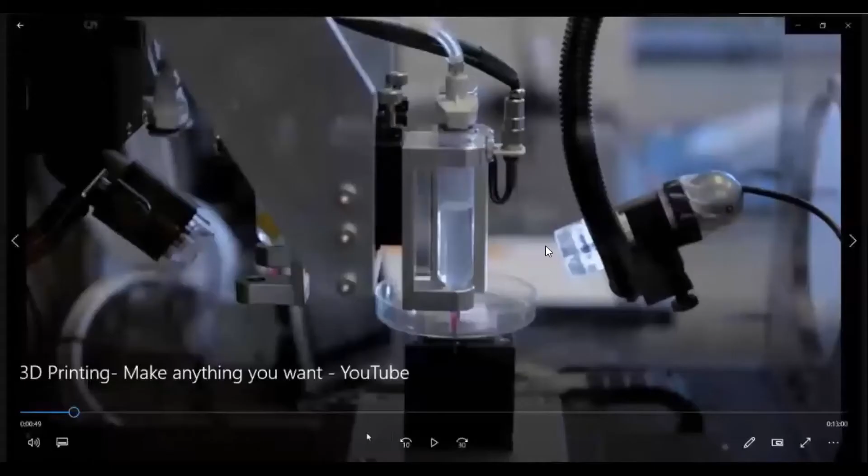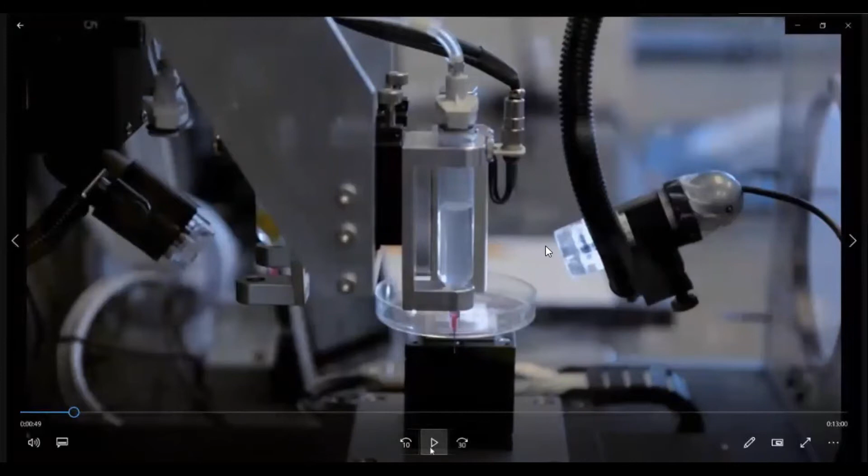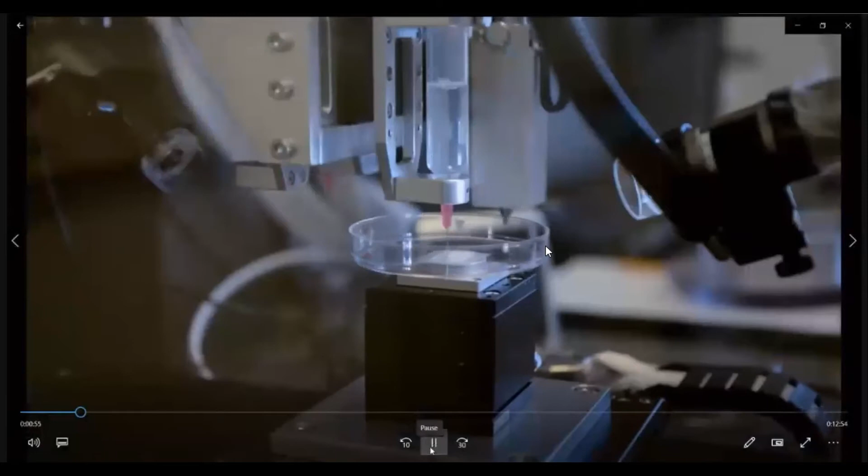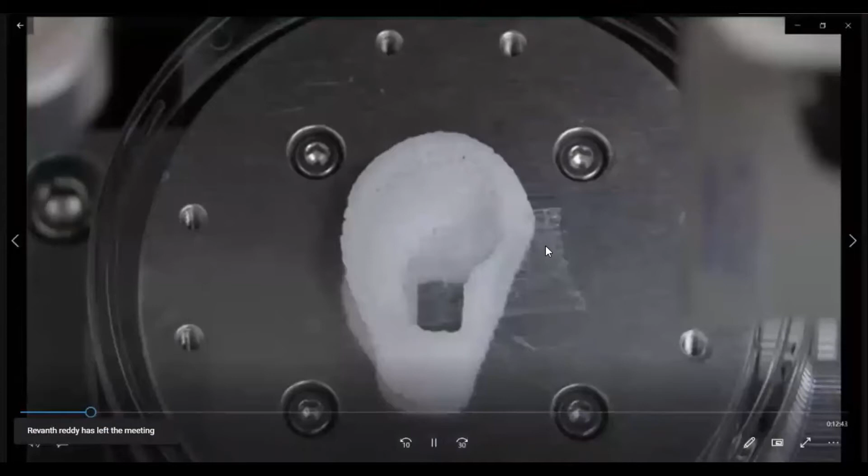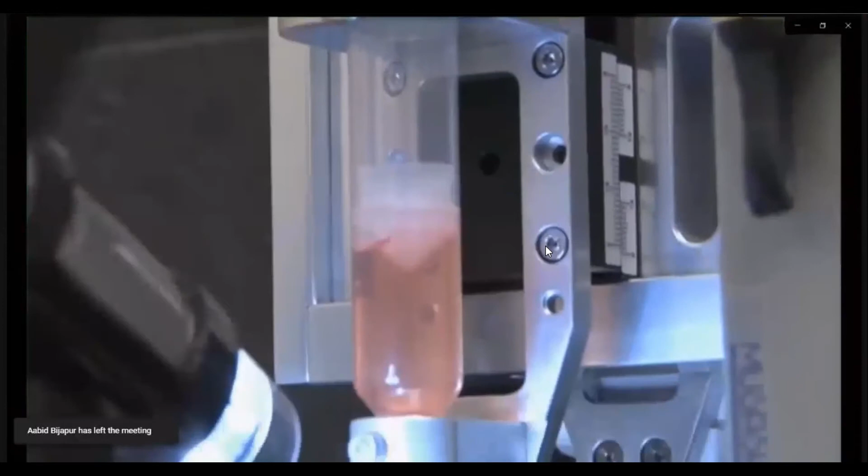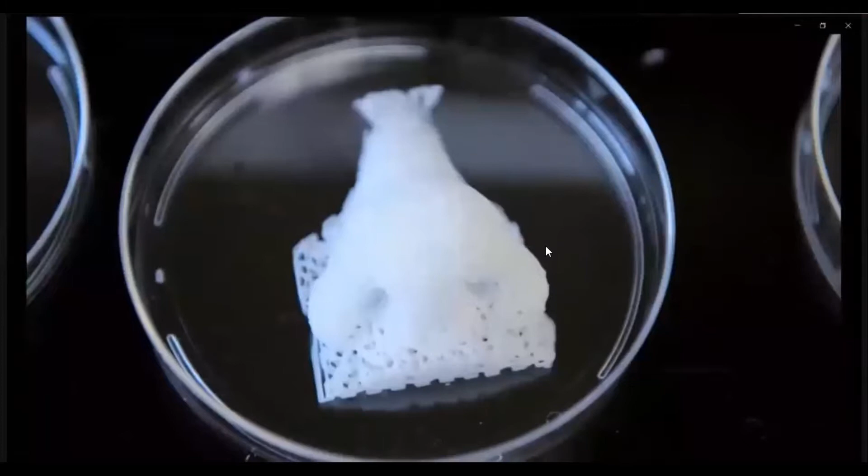The project is entitled 3D Printing. The premise is simple: send a scanned image of a body part to the printer, and the machine starts building ears, noses, fingers. Dr. Atala's goal is to transplant the parts directly into patients.

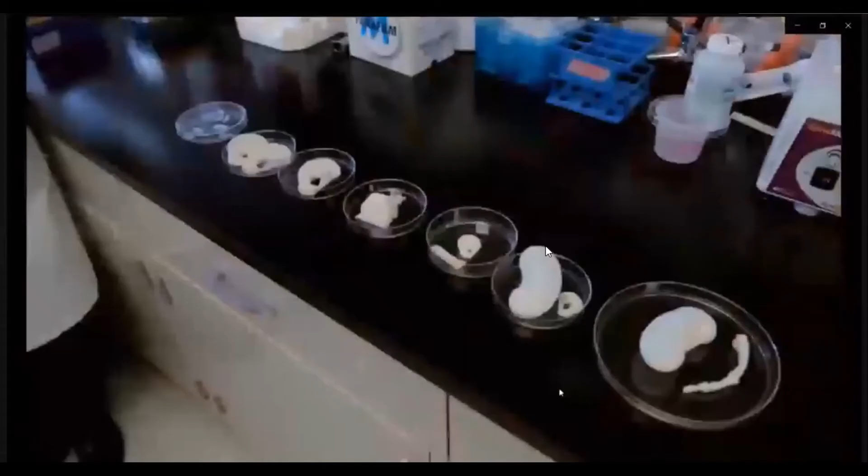We're actually testing a lot of these structures right now as well. The way it works is the cells are able to...

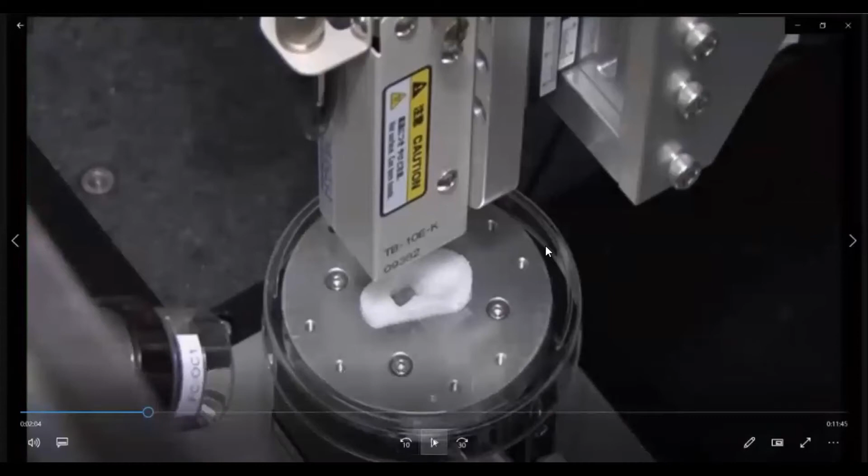Just start the video, please. They start making the tissue, and as that starts to happen, this pathway goes away. Yeah, there's an echo resounding. Please see your phone is muted in both volume and mic. Okay, yeah, then you can start the video. If the problem is coming in, let me know. Yeah, start from the beginning, it will be good for us.

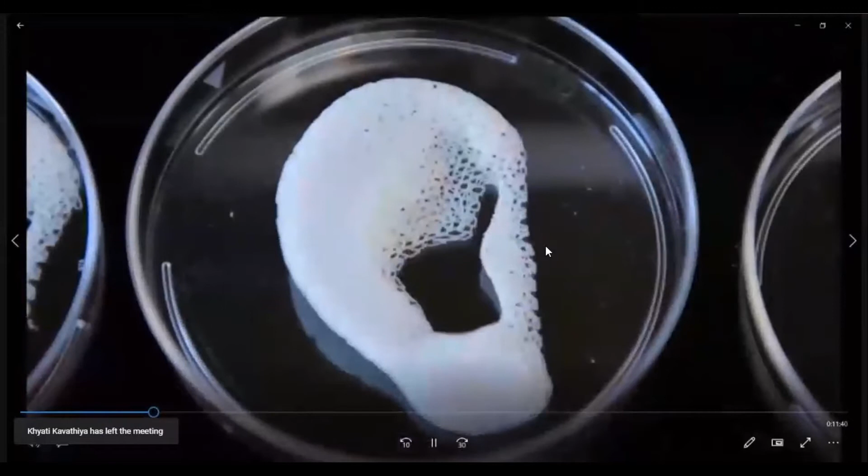With what's called bio-ink, a mixture of biodegradable gel and actual human cells. One of the big advantages of these technologies is that you are using the patient's own cells, and by doing so, you avoid the major problem of rejection.

Dr. Atala has specialized in regenerative medicine since 1990. But it wasn't until his TED Talk two years ago that the promise of building body parts caught fire.

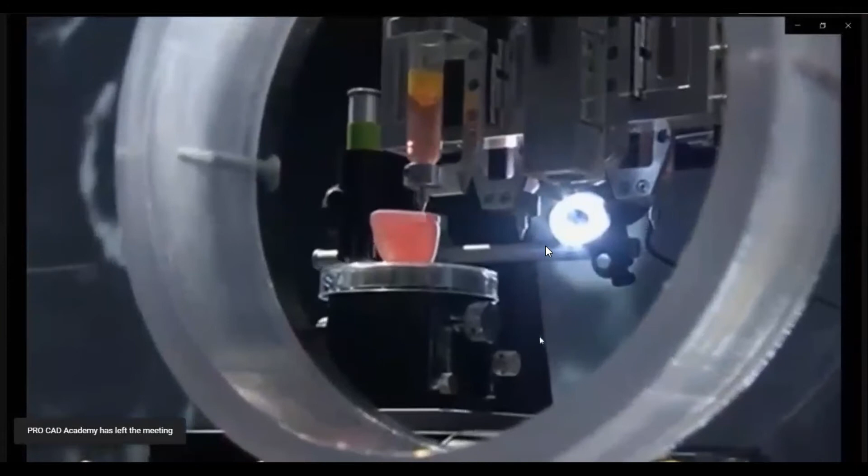90% of the patients on the transplant list are actually waiting for a kidney. You can see the printer back here, and that's been printing this kidney structure that you see here. You can actually see that kidney as it was printed earlier today.

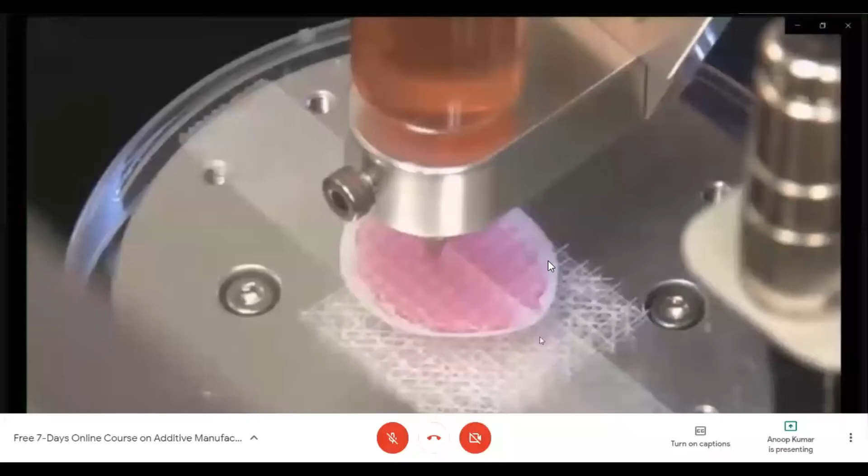While implanting kidneys like this is still at least a decade away, it holds the potential to revolutionize organ transplants.

Up until just recently, the way that we made these tissues was to actually create them by hand, one by one. When you start thinking about getting these technologies to many patients and creating thousands of these organs at the same time, you need to automate the process.

And that's where bioprinting comes in, meaning you can make thousands of kidneys, thousands of organs. You just pick the organ you want to make, and then you allow the printer to do them over and over again.

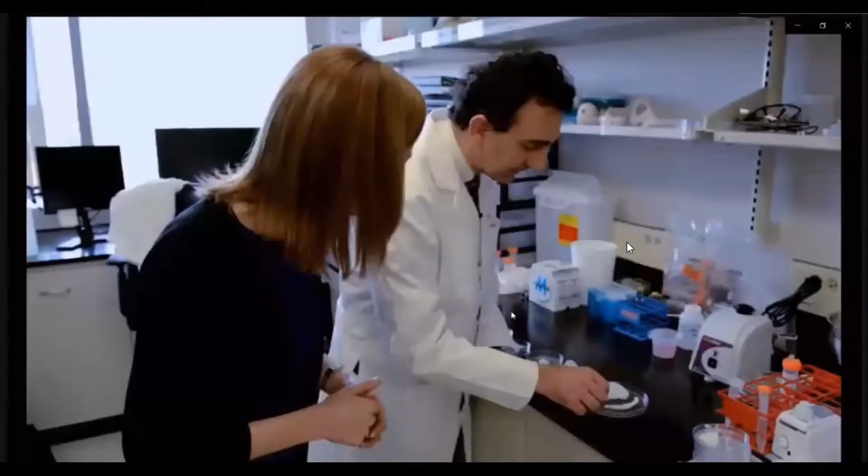Is this a finger? This is actually a finger. Right now, Dr. Atala's bioprinting is in the preclinical phase.

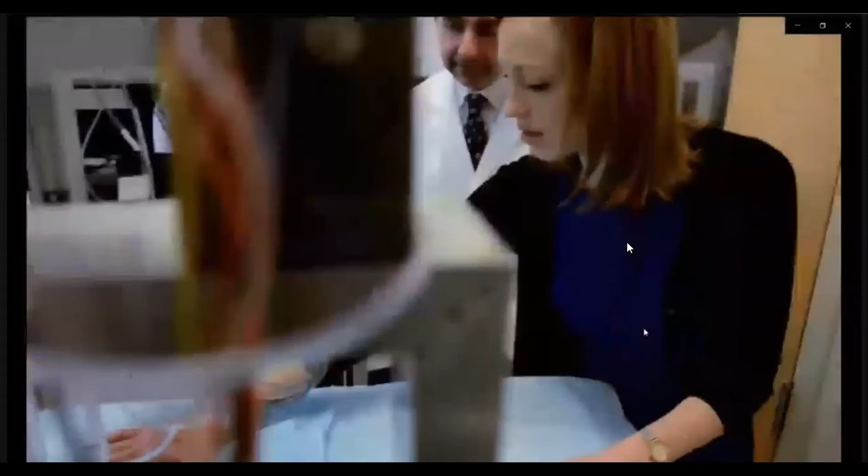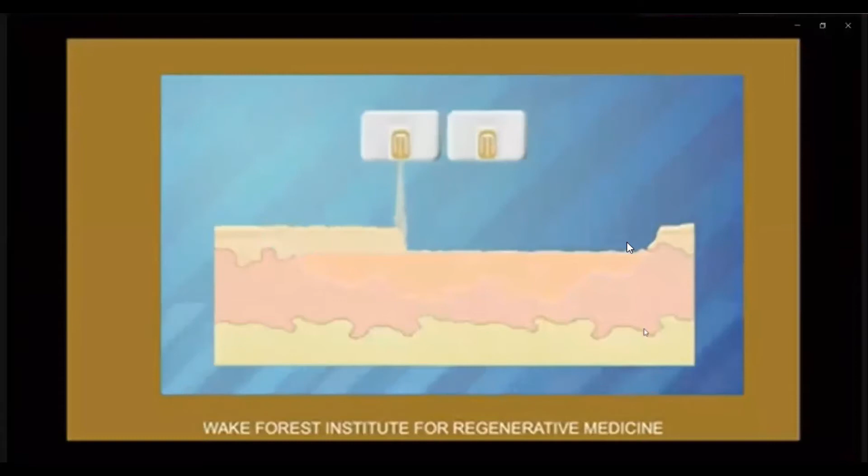Simpler organs will be the first to reach patients, starting with skin. If this were in fact a wound, it would be dropping real skin cells over the wounded area. The skin printing project is being funded by the U.S. military with the hope of treating injured soldiers in as little as 5 years.

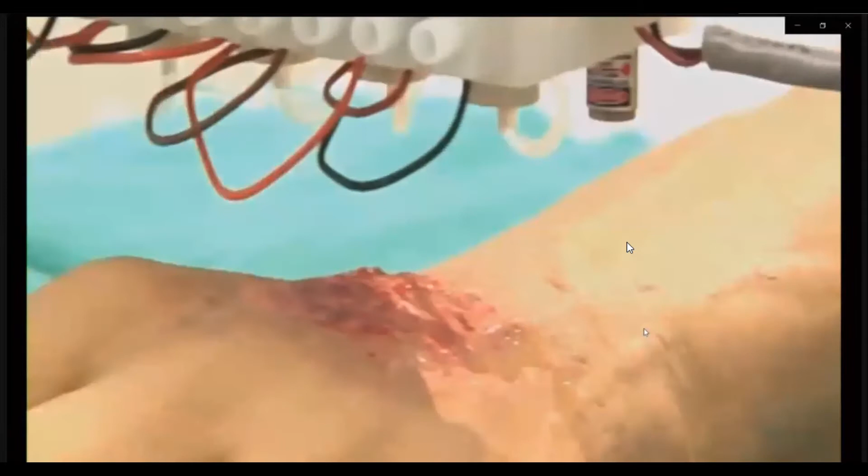But while Dr. Atala's work is cutting edge, 3D printing isn't new. The technology has been around since the mid-'80s, mainly used for prototyping in industrial settings.

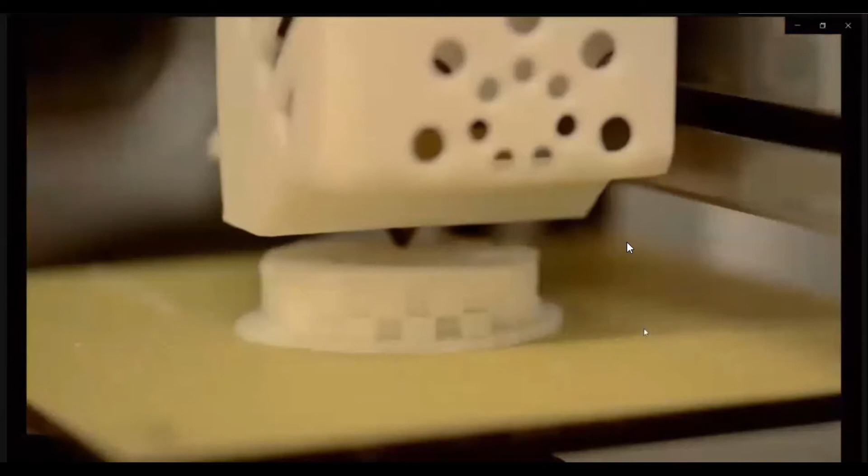Professor Hod Lipson from Cornell University says that's changing. It has reached a level of technological maturity that it is used beyond prototyping to actually make functional parts that are used in reality, and the aerospace industry is a good example.

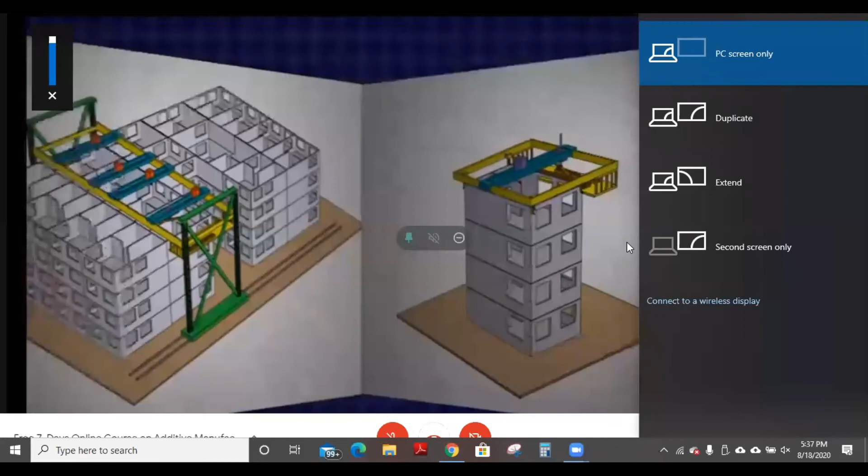Some commercial planes are now outfitted with air ducts that are 3D printed, smoother, lighter, and cheaper than the traditional method. Hollywood is using 3D printing to make costumes, like parts of a suit in Iron Man 2. And a professor in California plans to 3D print a house.

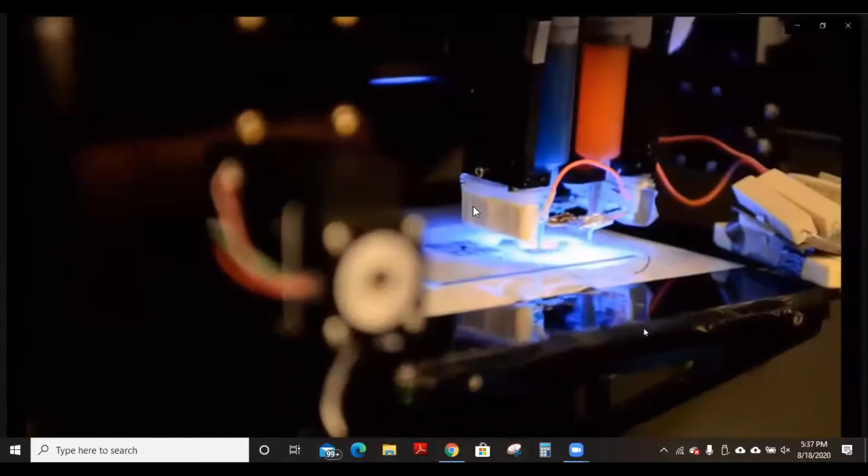In every case, a digital blueprint is either sketched or scanned and then sent to a 3D printer. The printing itself can be done by extruding a liquid, usually plastic, drop by drop, or by using a laser to fuse resins and metals. What we have here is a sample of a titanium nose implant.

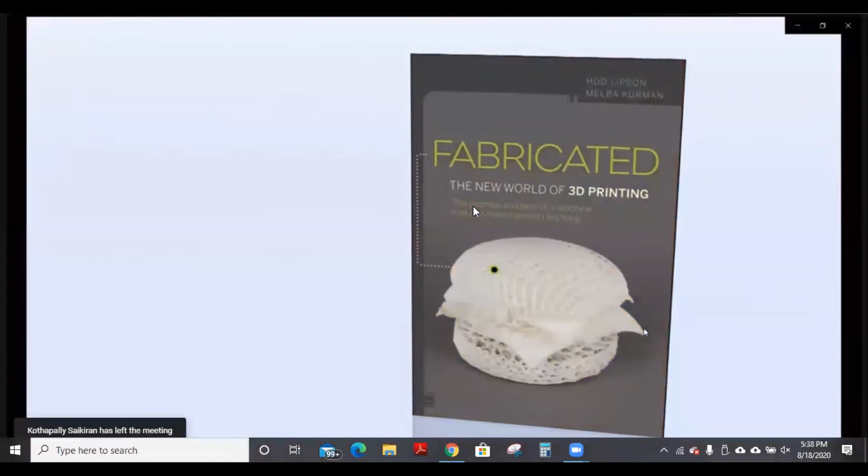Hod, who calls himself a 3D printing addict, has just co-authored a book on the subject that will be released next week. The one thing he's betting will spur demand for the technology may surprise you.

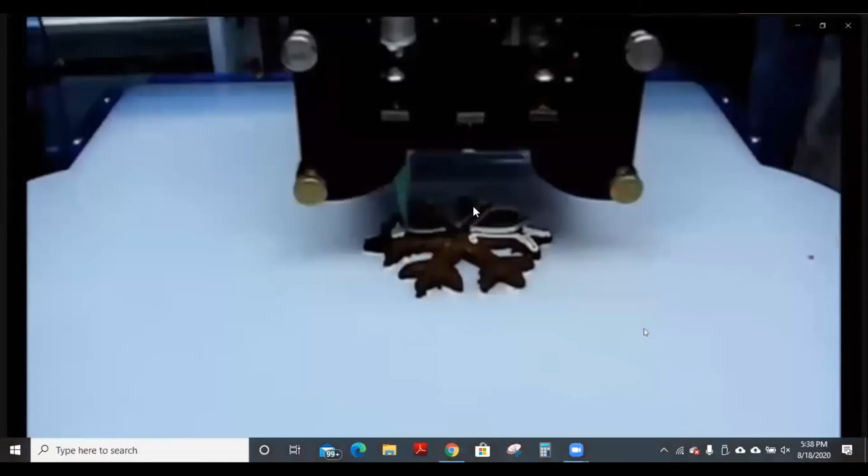I think it will be food. I think food printing is to 3D printing what gaming was to computers. Already, students at his lab have printed chocolate, peanut butter, even cakes.

Beyond food, there are few disciplines that 3D printing won't touch. Printing an iPod, he says, isn't that far off.

If you think about the evolution of humans, we like to distinguish ourselves from other animals by the ability to make tools. And 3D printers are perhaps the ultimate tool.

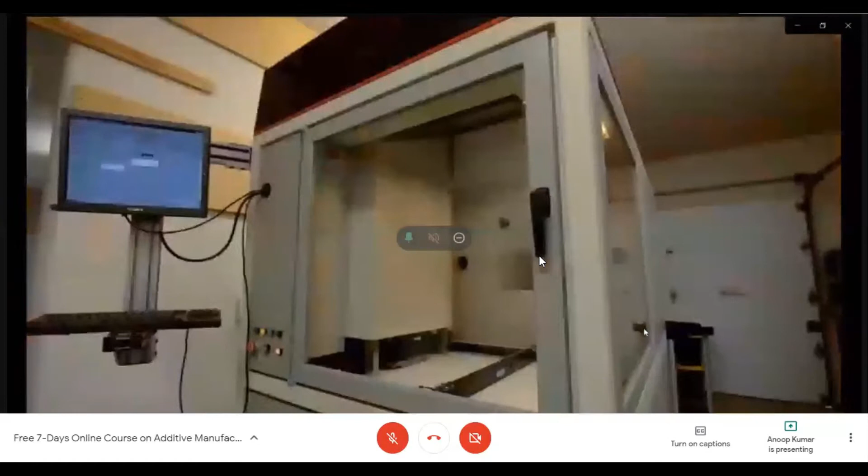But what happens to laws and regulations? You have a tool to print anything.

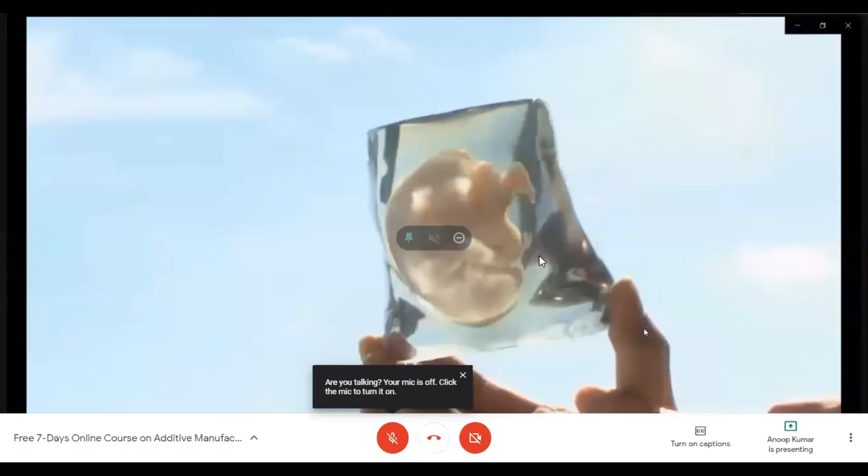From guitars to race cars, even a model of your unborn child, people who embrace 3D printing are finding new uses for the emerging technology. Once used at the industrial level only, 3D printing has gone mainstream.

Today in Manhattan, you can wander into a 3D printing store, the only of its kind, and take home your own printer for $2,200.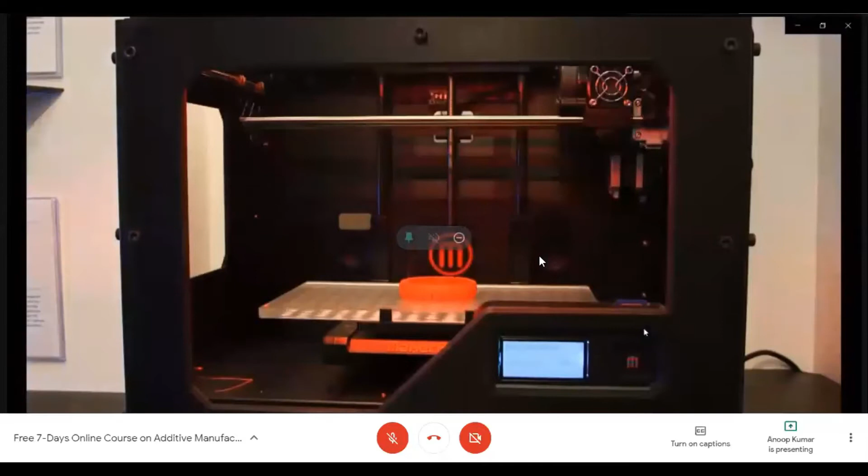Bre Pettis is the co-founder of MakerBot. One of the reasons we opened a retail store is because 3D printing is still science fiction to a lot of people. The idea that you can have a machine, send it a digital design, a 3D model that's virtual, and it'll turn into something real, a physical model - it blows people's minds.

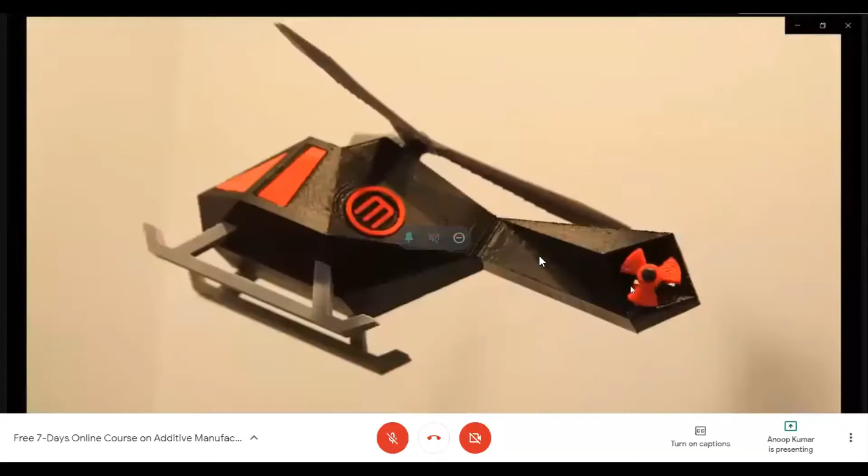From tools and toys to models and jewelry, MakerBot's printer allows anyone to design and create. We put the design in here with an SD card, pressed the big red M, and it jumped to life. It heated up, and now it's drawing, faster.

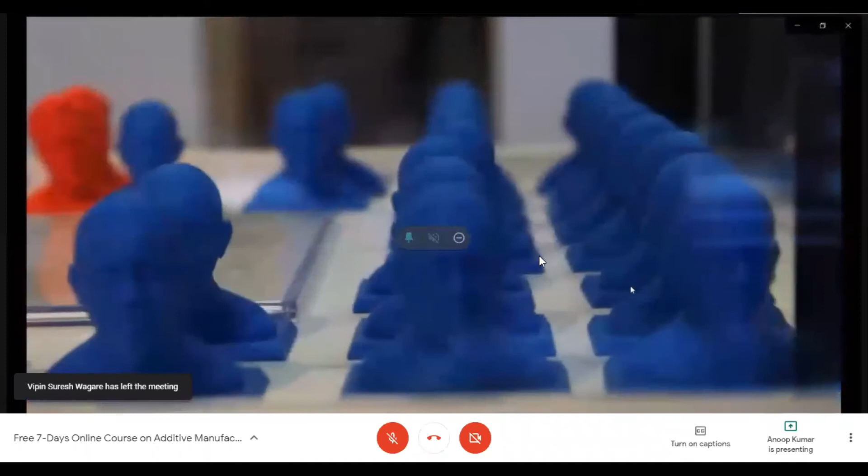To some, the printing is still rudimentary, nothing more than a novelty item. Bre sees it as a natural evolution. Back in 2008, you could download movies, you could download books, you could download music, but you couldn't download this.

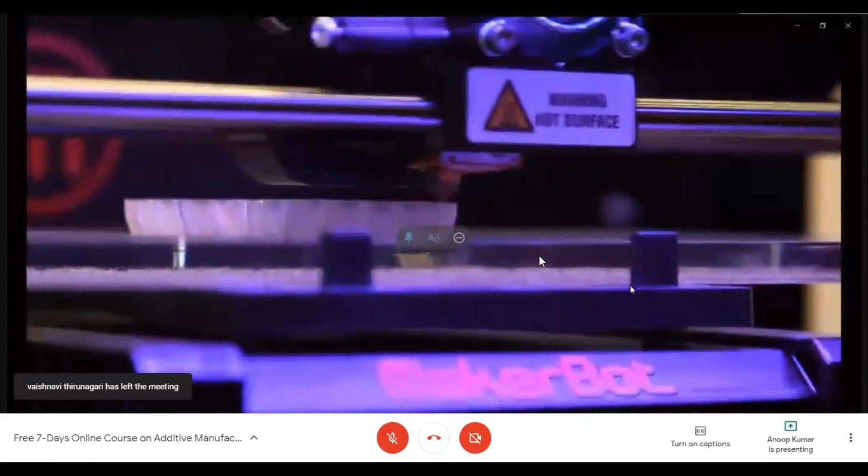MakerBot's printer only works with plastic, and it can only print items smaller than a shoebox. Still, more than 15,000 have been sold. Our biggest customers are NASA, GE, and 7 out of the top 10 architecture firms in the U.S.

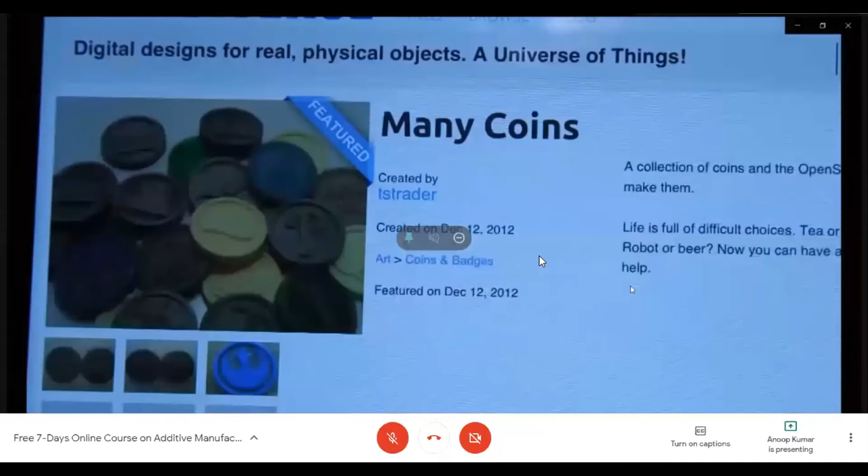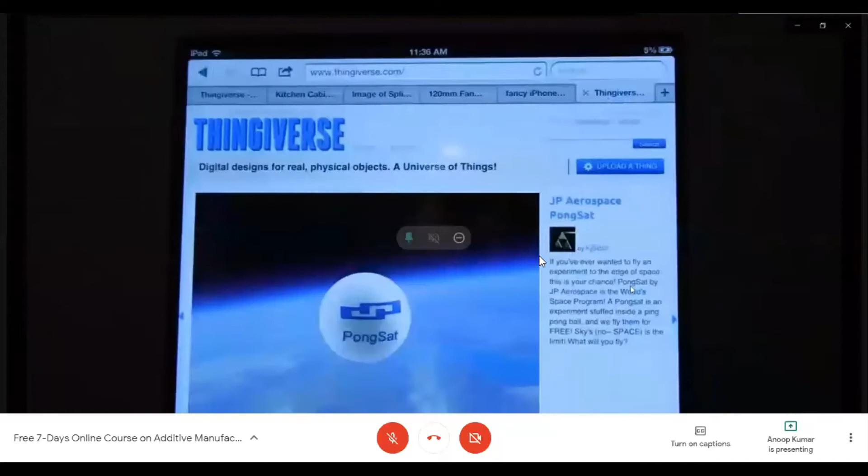The digital blueprints for items are found on a website called Thingiverse. We've got a kitchen cabinet door handle, a fan duct for your air conditioning - over 30,000 items that can be downloaded for free. An iPhone case, and this is a fun one - somebody needed carpet pin locks for their Toyota RAV4.

It's been dubbed Walmart in your home. So we're all used to shopping, and when we want something, we shop. We think, okay, where am I going to go buy it, instead of thinking, can I make that instead?

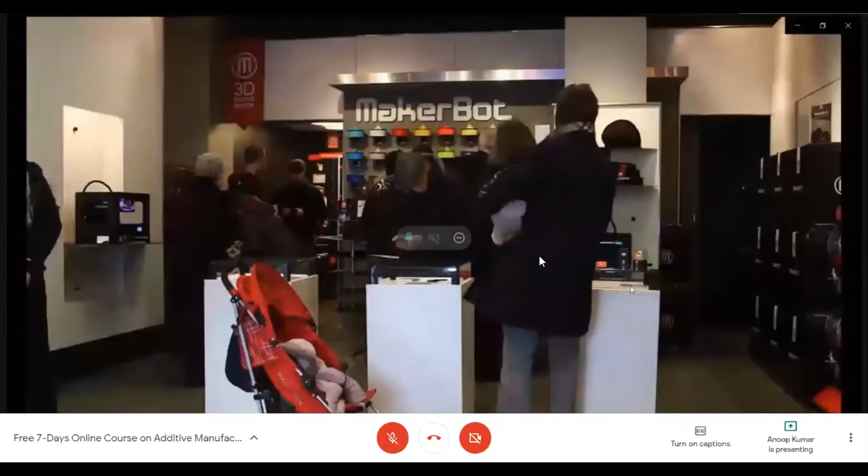But when you can make anything, there are seemingly no boundaries, which is exactly the point for Cody Wilson. We want to build the Wiki Weapon - the first in the world. Yeah, but the important part isn't to be the first, but to actually do it, to just have one.

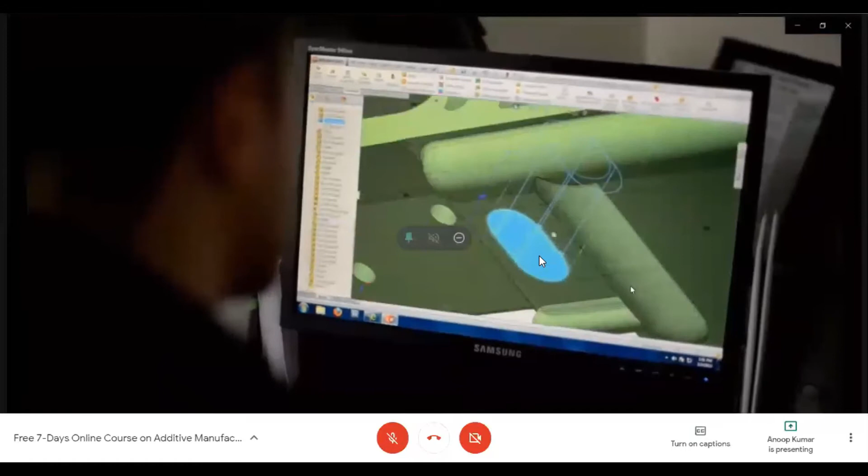Cody, a law student in Austin, Texas, is spearheading a group that's trying to create the Wiki Weapon, a digital design for a gun that anyone can download and build using a 3D printer.

You have said that what you're setting out to do will create a weapon at every computer. Yeah, the way of thinking is, where there's a computer, that could be a weapon - or a 3D printer. I don't think most people want a weapon at all. I think that's fine, I don't think you should be armed, right? But I think you should have the choice to be.

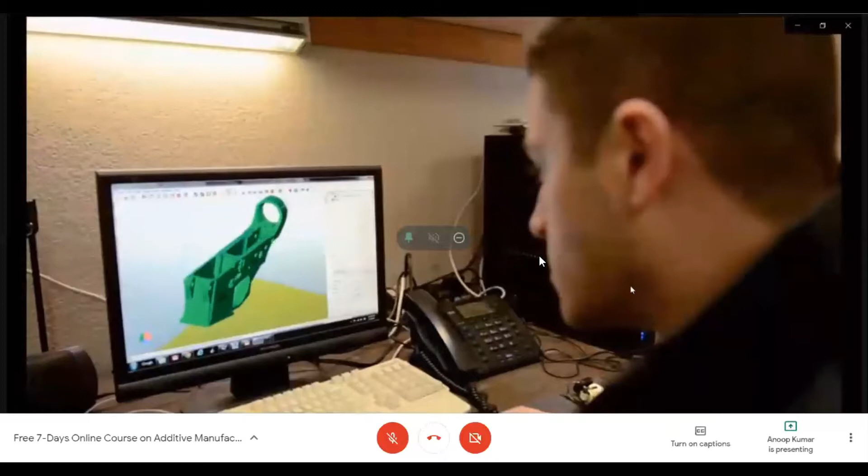While making your own gun in the U.S. isn't illegal, distributing the blueprints to others falls into a very gray territory. That's where Cody is running into a number of roadblocks. So in the meantime, he's printing gun parts to avoid breaking any law.

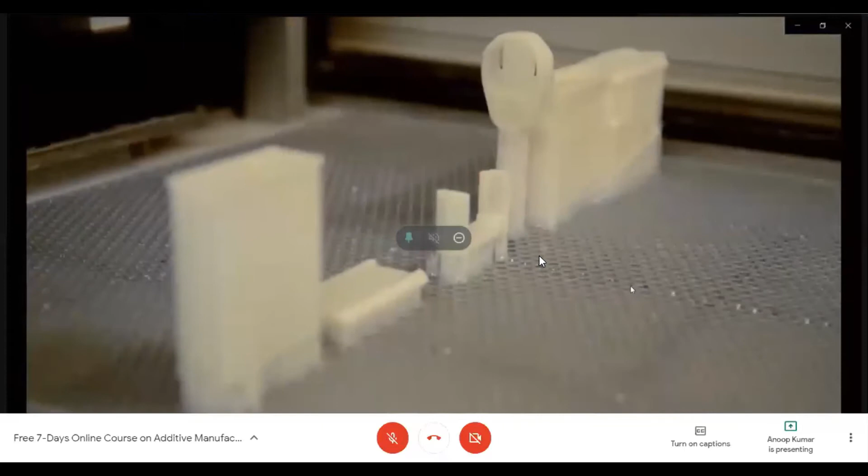What's coming out is a lower receiver of an AR-15. The lower receiver is the only regulated part of an AR-15 semi-automatic rifle, crucial to making the weapon work. As soon as this is clean, this will be legal.

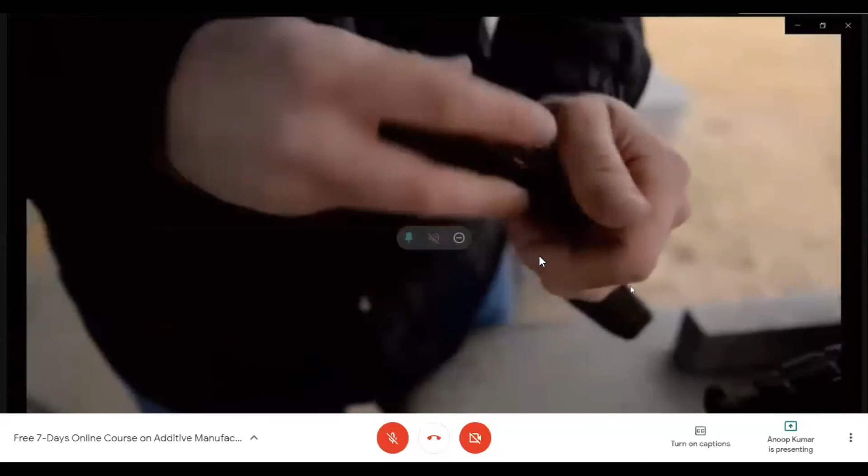At the shooting range, the plastic part fires 11 rounds. That's good, considering you couldn't even get the pin in. So 11 is 11. Back to the drawing board.

People will know the name AR-15 today because it was infamously used in the Newtown, Connecticut mass shootings. That's true. And you're providing people a digital blueprint to replicate a regulated part of that gun. That's right. That will upset a whole lot of people.

Sure, but many people are already aware of what this gun is. This gun has a proud, strong reputation coming out of Vietnam, and the civilian version of it - which the military uses, that's right. It's a people killer. That's right, that's what a gun is, in its essence. Let's not talk about turkey shooting and hunting stuff - what is a gun? A gun is a combat weapon.

We've met people who are using this technology to print heart valves, ears, nose, skin. I'm sure there are people out there who could say, why do you have to print this gun when there are so many positive uses for this technology? To us, it's not that we're makers thinking that's the best thing we can make - it's a political project. How do you achieve the results as defined?

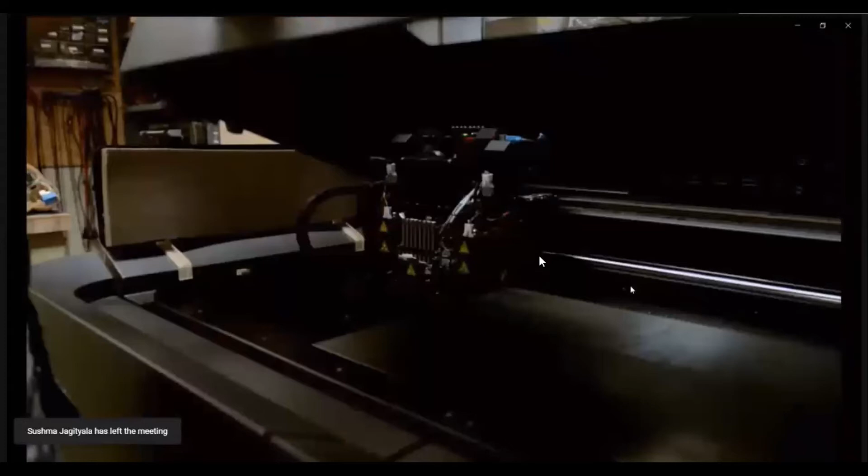So while 3D printing grows in a no man's land of few rules or regulations, Professor Hod Lipson is weighing the implications. It's also important to anticipate the consequences of this technology, for better and for worse. My goal, anyways, is to say there isn't anything we're going to be able to do about this - welcome to the future.

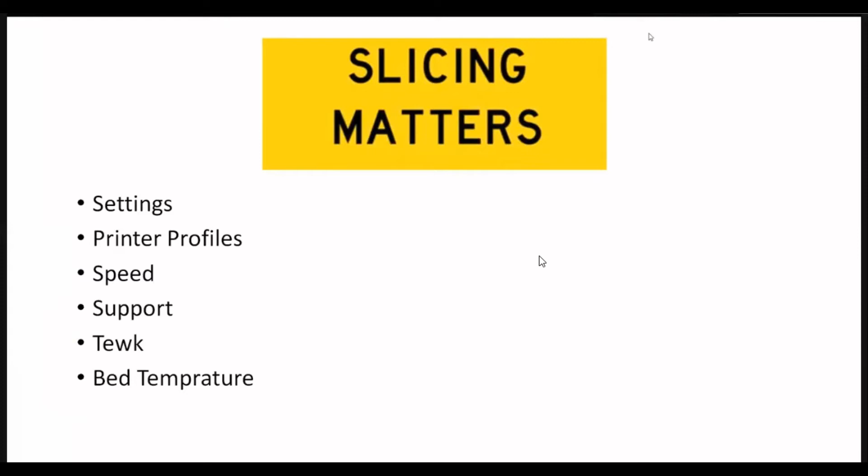Coming to the print settings part in slicing software - print settings always matter, and different print profiles affect the speed of the nozzle head, and support. You should know how to give support to a structure. There are automatic supports available that we will discuss in the next few slides, and how tweak works, bed temperature, nozzle temperature, etc.

As we discussed earlier, print profile always matters for print quality. Here is a print profile for different materials like ABS, HIPS, nylon, PE, PLA, PETG, depending on what kind of printer we are using. That's an inbuilt database already built into your slicing software, so you don't have to worry about that.

But if we need a customized profile, on the right hand side we can see a custom button. From there we can create our new profile. The inbuilt profiles we see - extra fine, low quality, rough quality, coarse quality, and extra coarse - are auto inbuilt profiles already available in a slicer like Cura.

For our course, we work on Cura. I am using two software with me, Cura and Simplify 3D. I will show you a glimpse of Simplify 3D, but our course will mainly work on Cura.

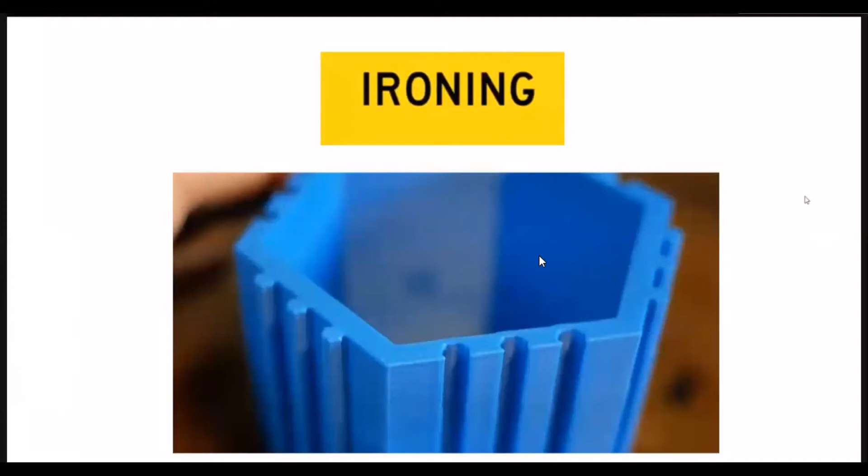Next thing - someone asked me yesterday whether we can achieve a good quality print or not. I must say there are a few little things we have to take care of. One is ironing. After completion of the print, if we activate this ironing command in our slicing software, the hot end will move on the last layer without burning any material, so we can get a smooth finish on the topmost layer, just like print quality on the bed side.

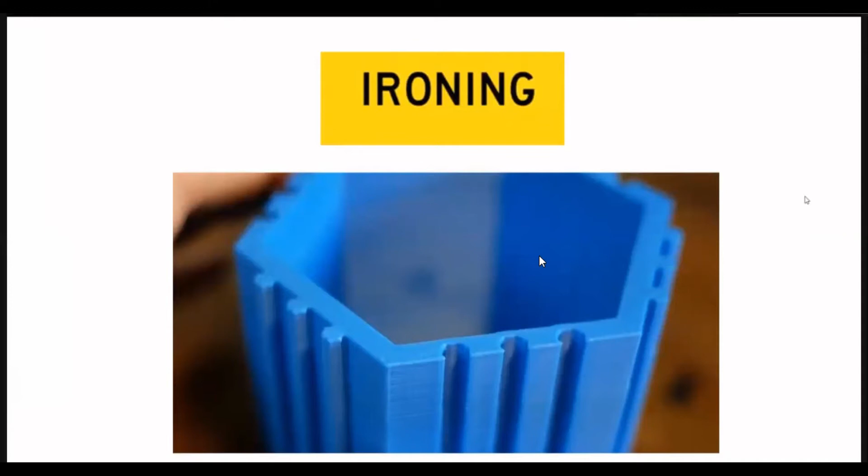Yesterday I already told you that the type of material we use also matters for different applications. Here we have PLA which works around 180 to 210 degrees Celsius. It is used for making models like architecture models, different prototypes used in day-to-day life, like fan design, bottle design, can design. I printed a mask using PLA because it's a totally biodegradable product. Since prototypes are used for testing, they might fail, which creates waste for our environment, so PLA has been used for first testing of prototypes.

Then we have TPU, a flexible material that usually works from 200 to 220 degrees Celsius. To avoid stringing and maximum oozing, most people work at a temperature of 210 degrees Celsius for TPU printing, because this material gives flexibility.

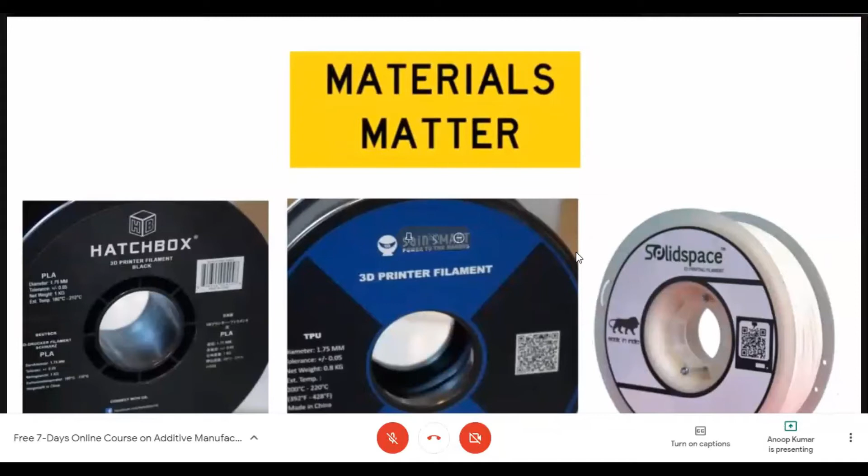We have to maintain bed temperature at 90 degrees Celsius for ABS, compared to PLA which works at 60 degrees Celsius, and TPU which works at 65 degrees Celsius. ABS requires a hot end temperature of 240 degrees Celsius and bed temperature of 90 degrees Celsius.

The second most useful thing to understand is how we should give support. There is a Dr. Doom's model here, standing on a platform, and his hand is in the air. If we want to give support to this hand, how could we print in air? We can provide manual support to a model, or it could be automatically generated by the printing software.

When we give manual support, usually people work with 15%, but sometimes less, to save material and get a quality print, because the more support there is, the more it will stick to the print and create an uneven surface, losing smoothness. So we try to work with less and less support, but here we can't.

If we can't give the support, the print will definitely fail because we can't make this hand stay in air. But in the case of SLA, the liquid resin provides the support, and in SLS the powder provides the support—that's a different thing. We have to first start with FDM printers, so understanding support for printing on an FDM printer is a must.

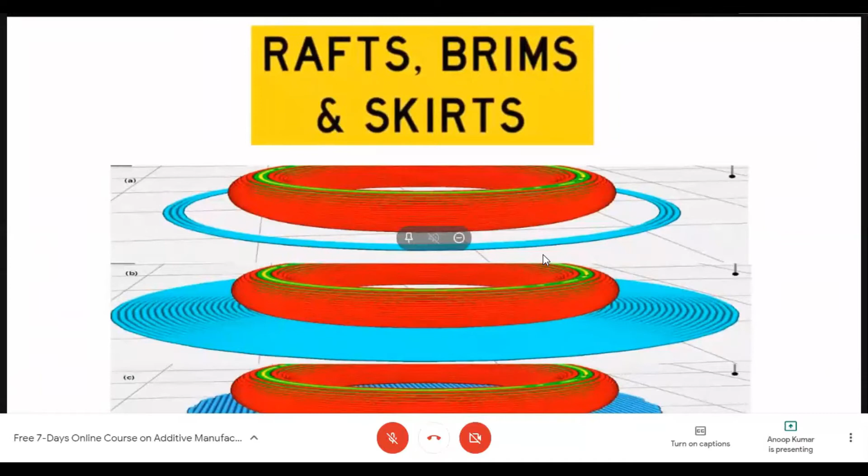But in case of raft, when we create a raft, it's because our bed is not even. Sometimes when the bed is uneven, we must provide a raft just to level everything. The raft will cover the whole area around the model, and the model will be placed on the raft only. We can see here the big skirt-like structure.

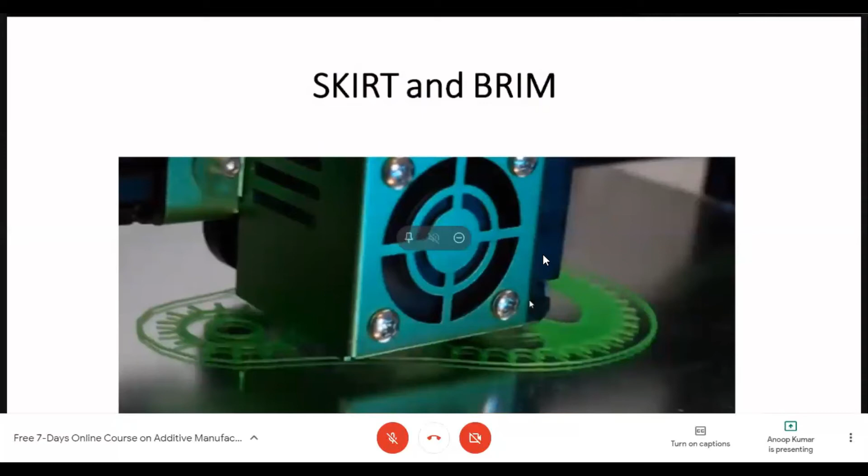But in case of raft, the raft is made entirely on the printer, and all models are printed upon it to get a good surface finish, as opposed to printing on a rough surface. This raft is easily detachable—there won't be any structures or patterns, and the bottom portion will be smooth compared to printing on a porous or rough bed.

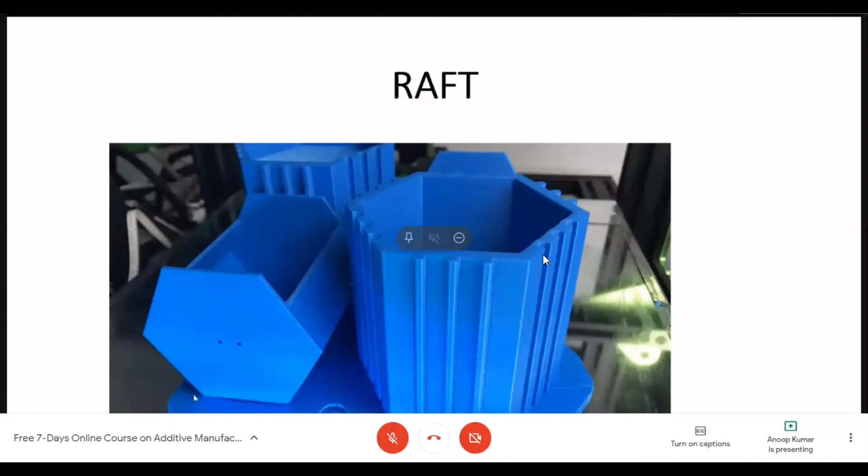As I was talking about sticking of a print, the model should stick to the bed and the print should not fail. Sometimes, talking about PLA, when printing time is more than 10 hours, because of an abnormal condition, the print starts warping up from the bed because it is not getting adhesive or a strong hold from the bed, since we are using a plain or smooth bed. As the surface roughness is low, it won't stick to the model we are printing. So whenever I say print, understand that it means the model we are printing.

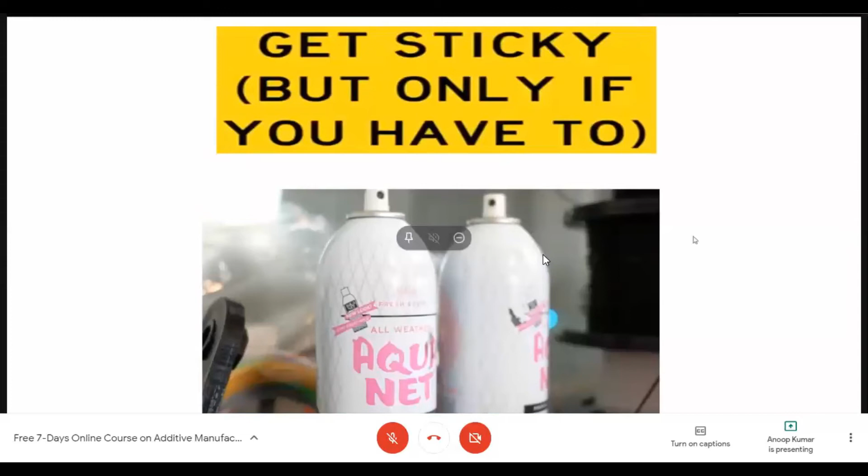Here, when we spray the bed with hairspray, we use any hairspray that we'd normally use to spike our hair, or a setting gel like Set Wet. So to set a print, we need to spray hairspray on the bed to help it stick.

I don't have a picture for this, but I must say we should always print on a glass surface. There are extra surfaces made available by the printer company, but they are quite porous in nature, and if the print bed is porous, we will not get a fine quality on the lower surface of the print. So I always suggest using a glass base, though glass is not the ultimate base for printing.

There are many other bases available, like metallic bases that stick to the aluminum plate of the printer. If it's easily removable, like a magnetic plate, we just twist it and the print will easily fall out of the bed.

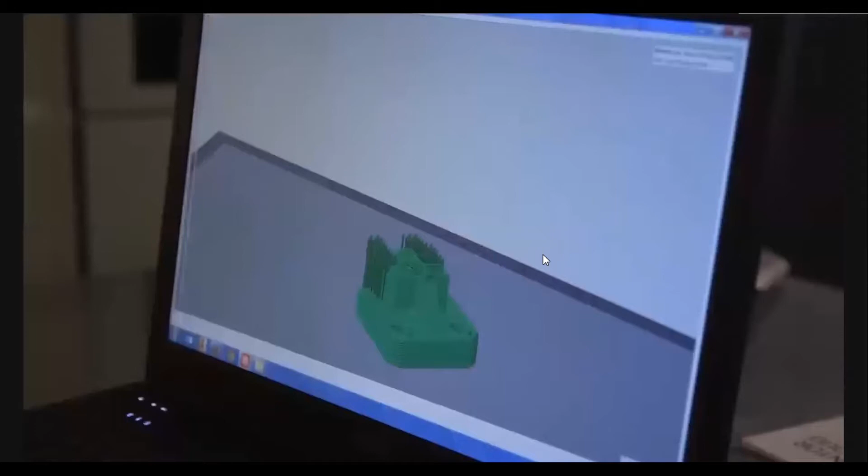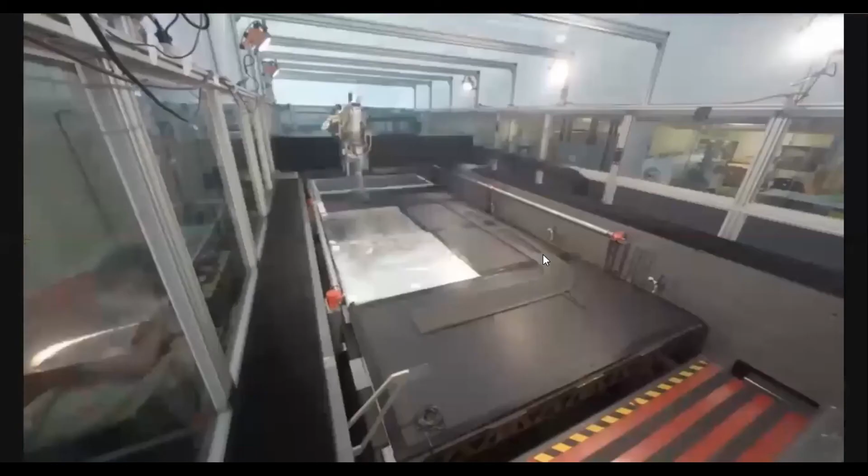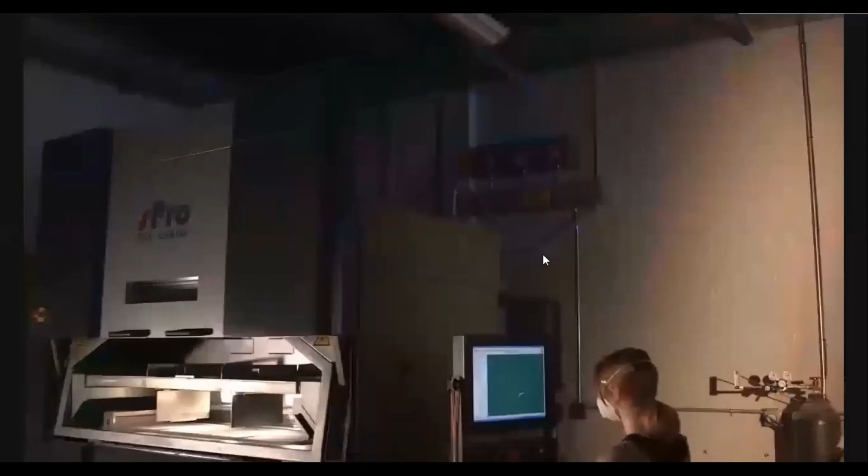Additive manufacturing, also commonly known as 3D printing, is a process that allows you to create physical three-dimensional objects directly from a computer design file. One of the most exciting things about additive manufacturing is it allows you to innovate quickly. You can try designs over and over again and actually test a physical printed part at the end of your design cycle, rather than having just one chance at making a functional part. There's a whole wide range of materials used in 3D printing, including polymer composites, metals, ceramics, and more exotic materials like foams, gels, and even living tissue. We've 3D printed objects from large things like houses down to functional nozzles and heat exchangers for industry, all enabled by the flexibility, speed, and new designs 3D printing allows. The Advanced Manufacturing Office partners with Oak Ridge and other national laboratories alongside industry to solve fundamental science-based problems presented by 3D printers today, with goals to improve the energy productivity and competitiveness of U.S. manufacturers, and provide opportunities for high-paying, high-impact jobs in technology.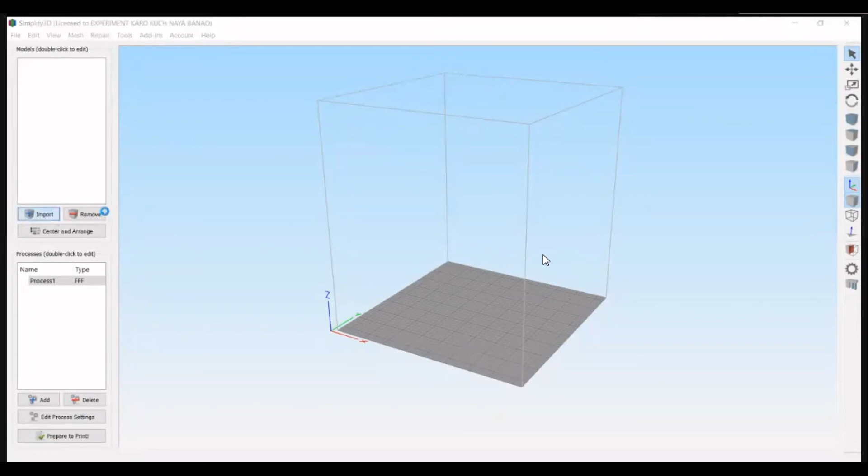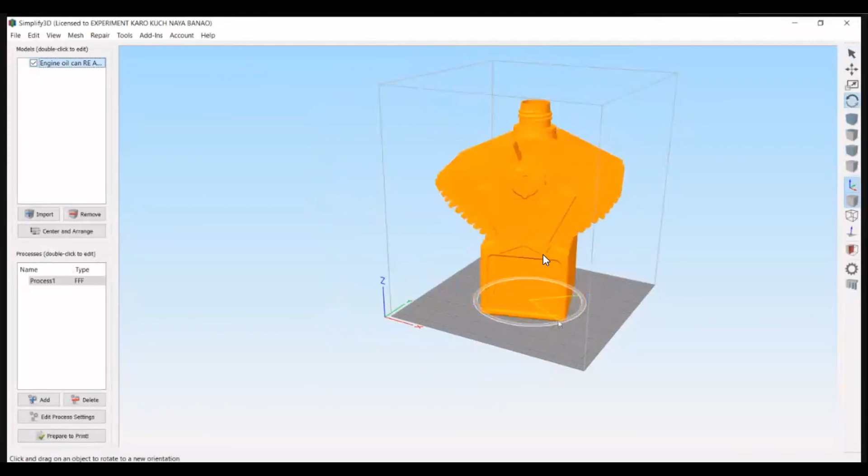You can rotate it, we can scale it down, and many more things we can do.

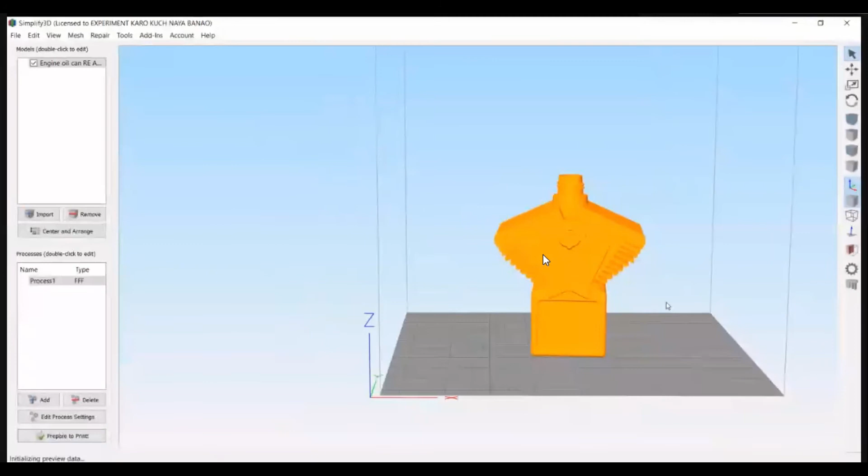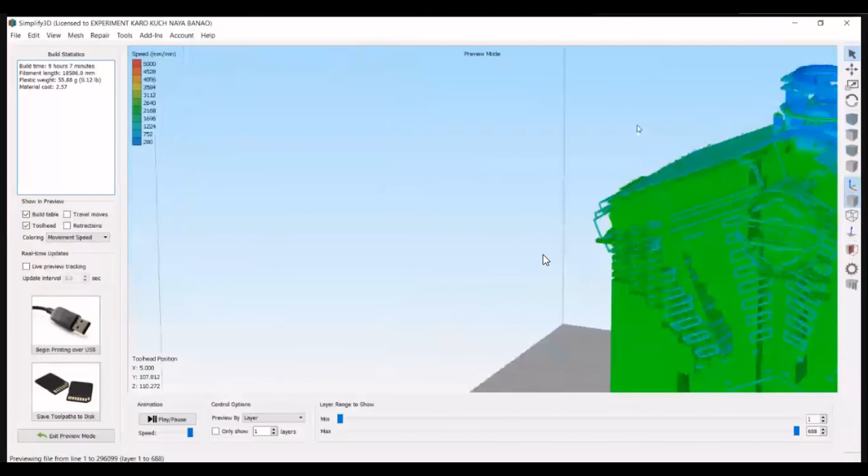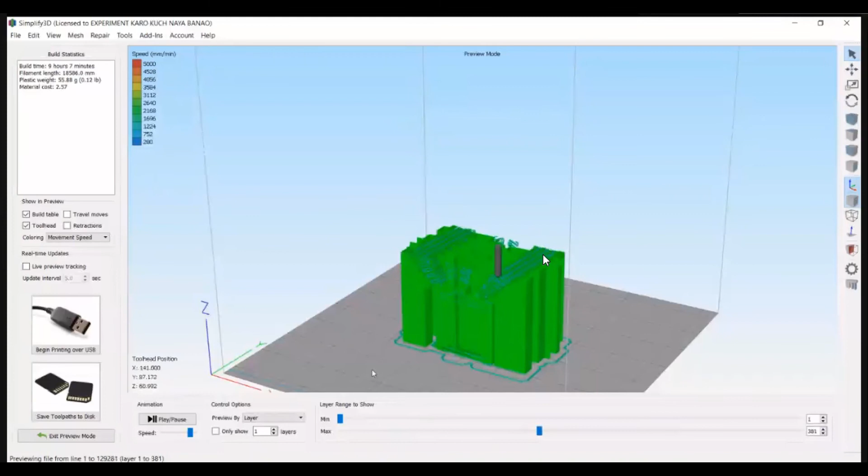If I show you how the print will start, you can see how a print is looking while extruding. You can see the movement of the extruder, how our extruder will move, moving to the window while we print.

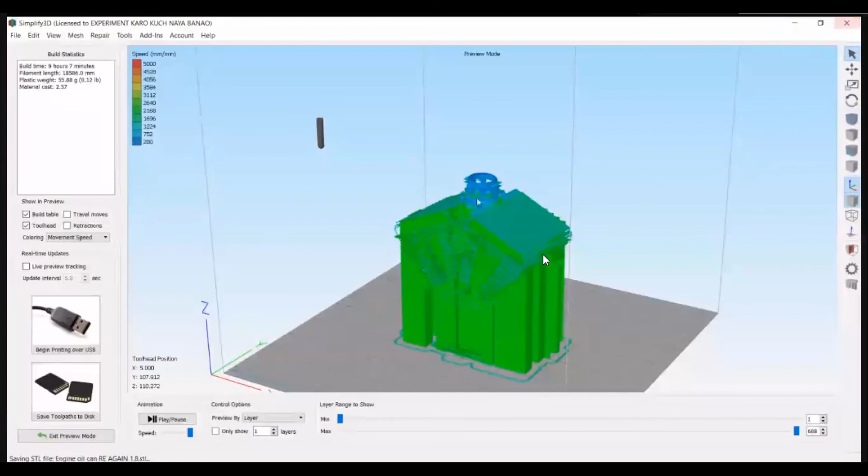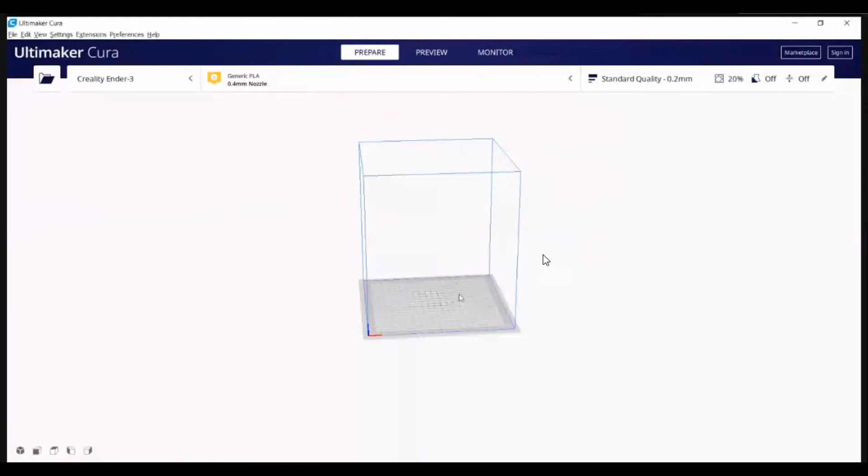So now the print has been completed. And here is the next software, Cura, that will work on this software. So every person who is having a laptop must install Cura for tomorrow's session, and you can download it from the website ultimaker.com.